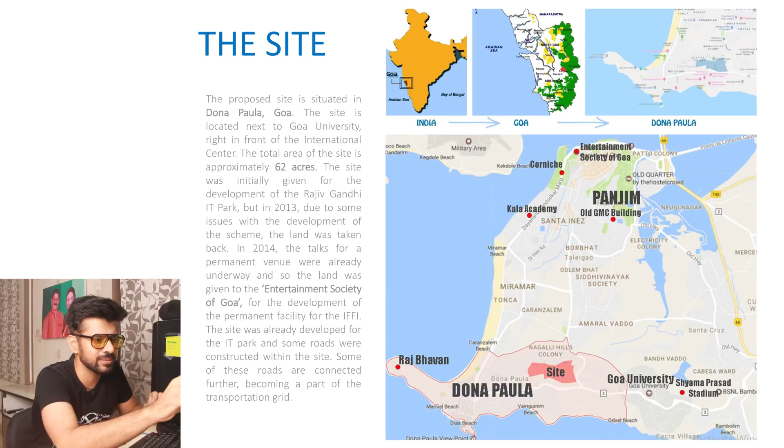Some stats I'll give you about the site. The site is approximately 62 acres. It was initially given for the Rajiv Gandhi IT Park, but there were some corruption issues. Something happened in 2013. The site was taken back from the Rajiv Gandhi IT scheme and it was given to the Entertainment Society of Goa, which was specially formed to look after the International Film Festival of India. So those guys were given this site and they were told, you know what, do whatever you want to. And they were like, yeah, tab se ab tak kuch hua nahi hai. But so this is where the site was and this is where the complex was to be made.

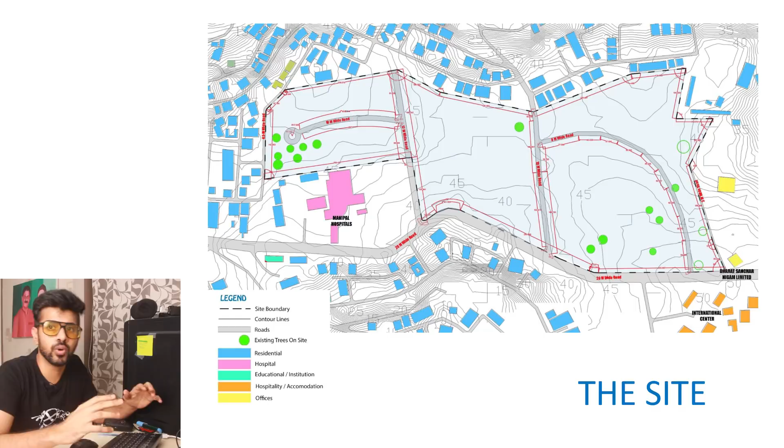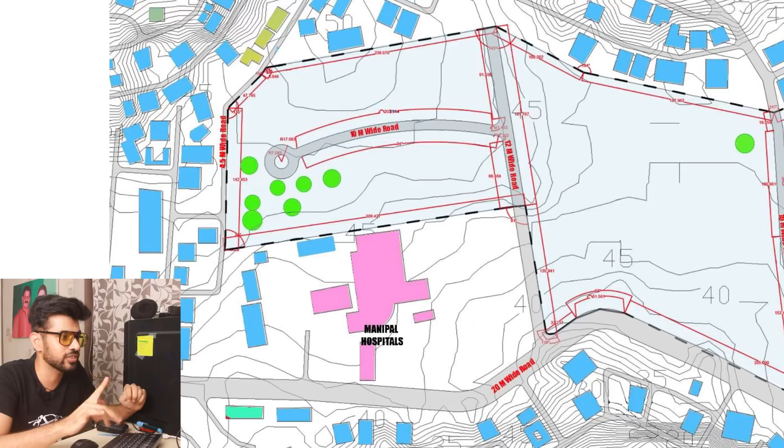Okay, so the blue are the residential areas. There are some hospitalities, some government offices here and there. Now one major thing that I do want to tell you is there is Manipal Hospital right next to the site. This thing that you can see in pink, that is Manipal Hospital and it is right next to the site. So this was one thing that I had to take into consideration.

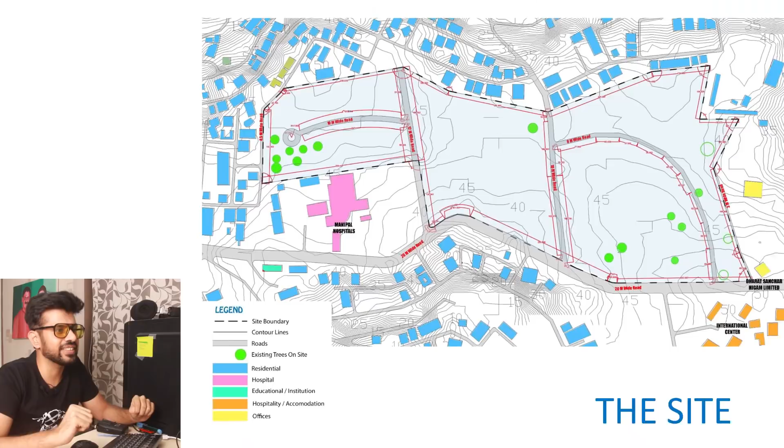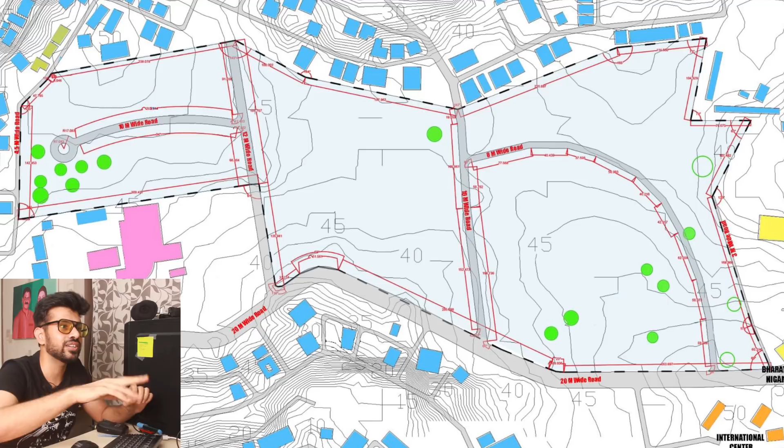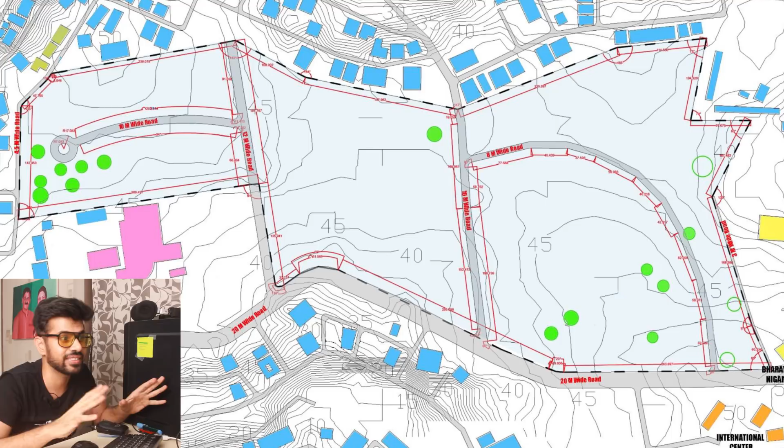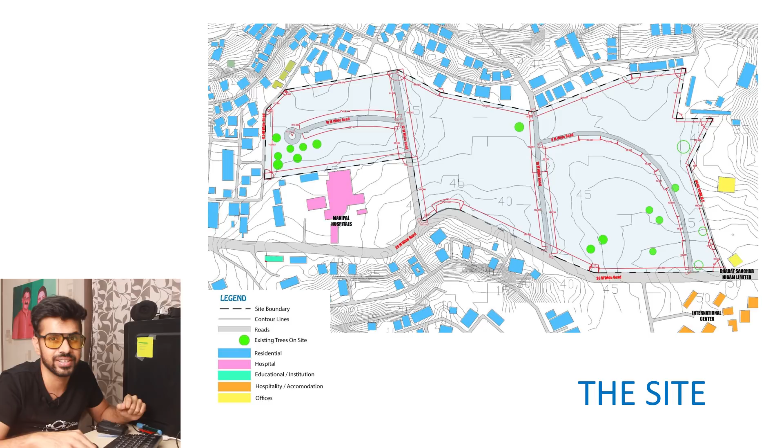Now one thing also I will tell you about this site is that obviously this huge parcel of land is the site, but do you see the roads inside the site? So the Rajiv Gandhi IT people had already started some constructions, divided this site, and then made roads which further connected to the localities at the far end. According to the government, these roads had to stay there and I had to just make things around these roads. So even though I had a 62-acre site, the site was basically divided into 3 parts. So this was the one main challenge that I had on the site. But let's go on to tell you what all functions were needed on the site. What was the program?

And as if these were not enough, I added 3 more programs of my own: a 3D simulation and a virtual reality building, a motel which finally turned out to be guest houses, and third, a drive-in theater. So these were 3 additions that I gave to the site.

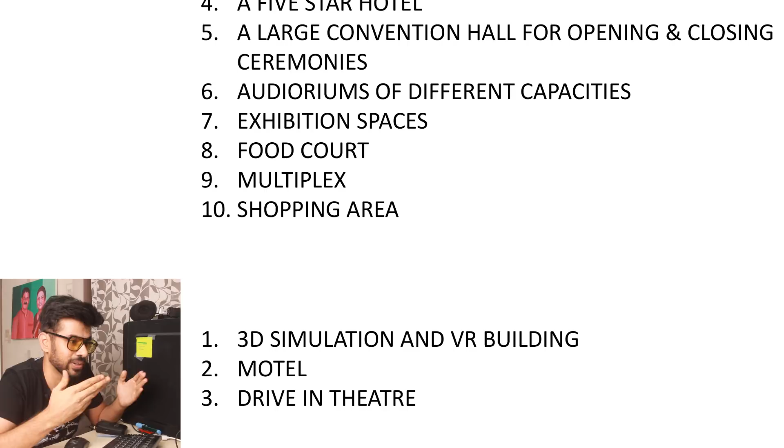So because of these huge functions, there could be limitless possibilities. I could just do anything anywhere. I could place this here, this here, this here. But to be honest, that did not make sense to me. I needed it all to make sense. I needed there to be a reason that this thing is placed here, and that reason had to be strong. I needed the placements to make sense as a whole.

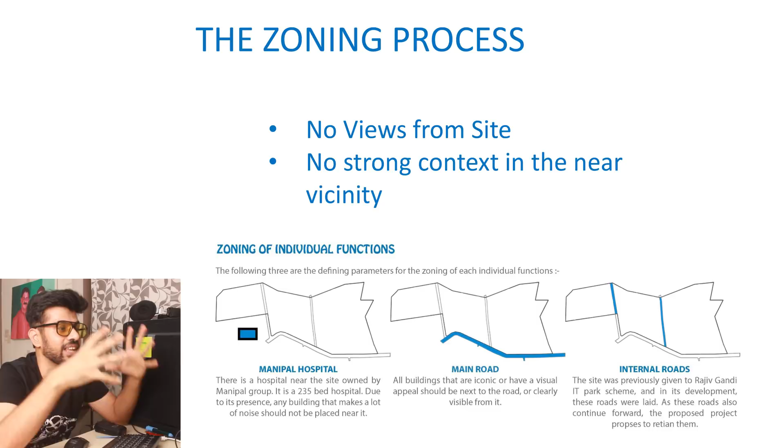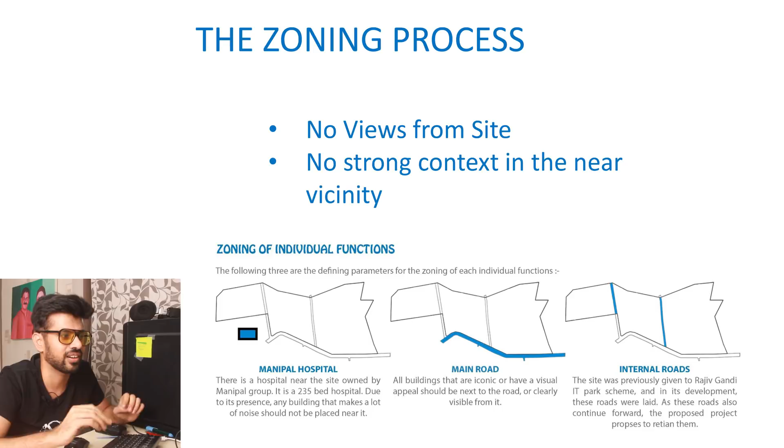So, this is something that is important and one of the genius things that I did on the site. There are three main factors that I had taken from the site. Obviously, we know there are no views from the site. There's literally nothing visible from the site except some buildings and dead trees everywhere, and no strong context in the near vicinity. So even though Goa and Panjim as a whole have a strong context, there was no strong context on the site, and even the beach was very, very far. You can't walk and reach the beach. Obviously, there are these constraints, but there were also three more constraints.

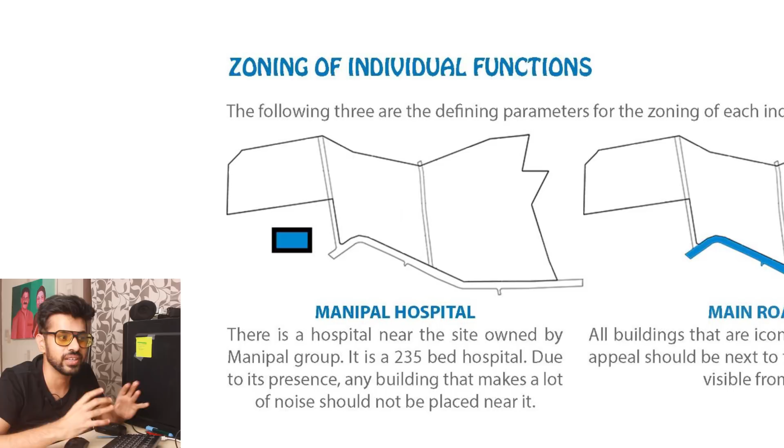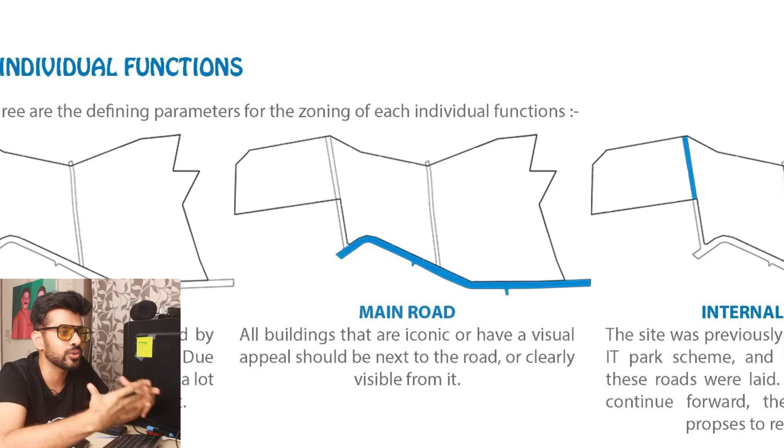One was the hospital. The hospital was right next to the site, so I had to make sure things that make a lot of noise should not be near the hospital. Second was the main road. This main road is where people will approach the whole thing from, so a lot of buildings that have to catch attention need to be near the main road. The third was the internal roads. Other things could be reached through these internal roads, but these internal roads also divided the site into three halves.

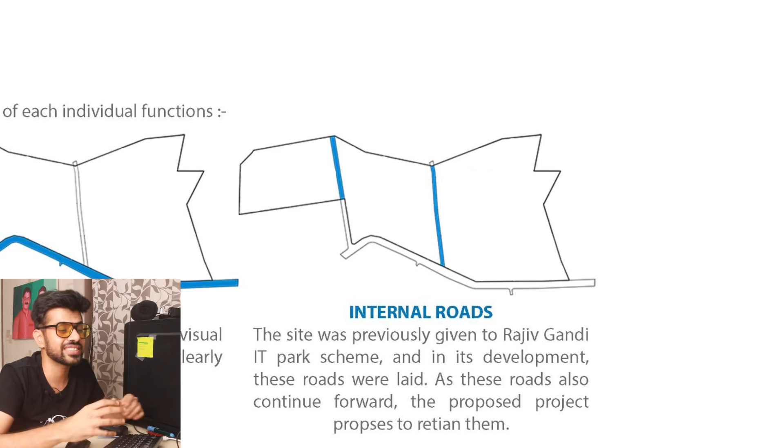So taking these three constraints, to be honest, I had just done random things, and I had made like 15 different site plans randomly. And my thesis guide was like, yeah, why don't you just take one of them? All of them look nice. Just take one of them. I was like, no, sir, this still does not make sense to me.

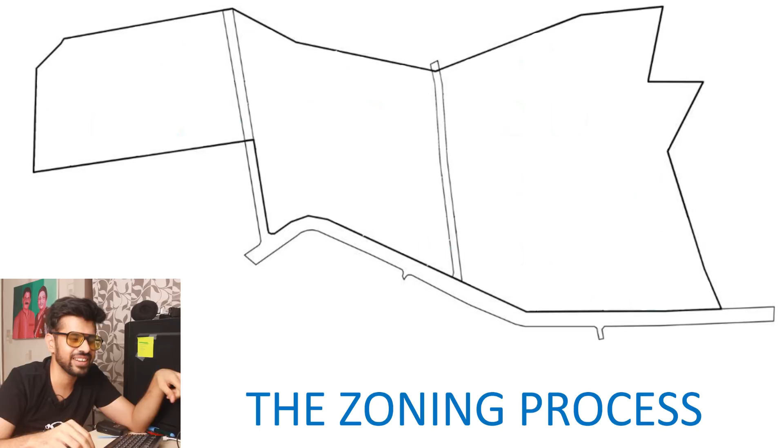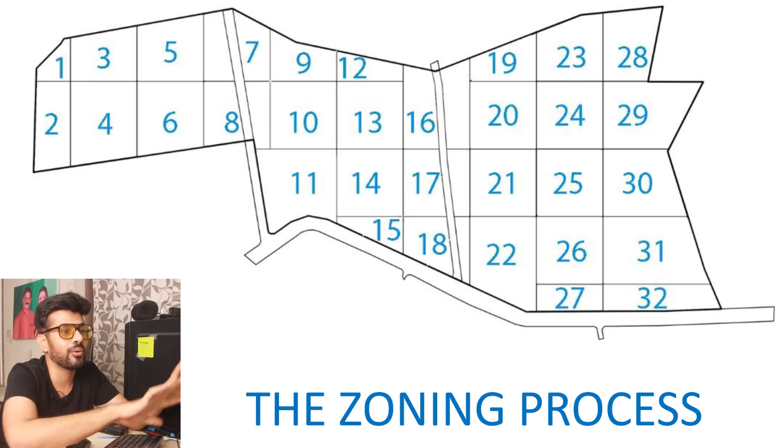And I was frustrated, and randomly one day I took this site plan and an A4 sheet, and on that A4 sheet made a grid. So this grid that you see, I did not divide the site evenly or properly within areas. Maybe I should have done that, but using that grid on the A4 sheet, I just divided the whole site. And now I had all these 32 different zones on the site. Now comes the genius part.

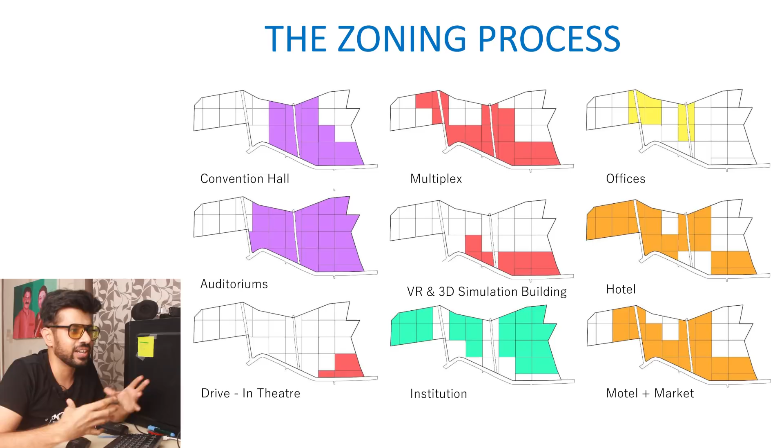I took each of the functions individually and zoned them. So convention hall, where all it can be, multiplexes, where all it can be. And all of these had parameters. Convention halls needed to have easy access, but could not be near the hospital because it would make noise. As much as it is insulated, it would make some noise, and it'd be huge because these are opening and closing ceremonies. So obviously it can't be near the hospital.

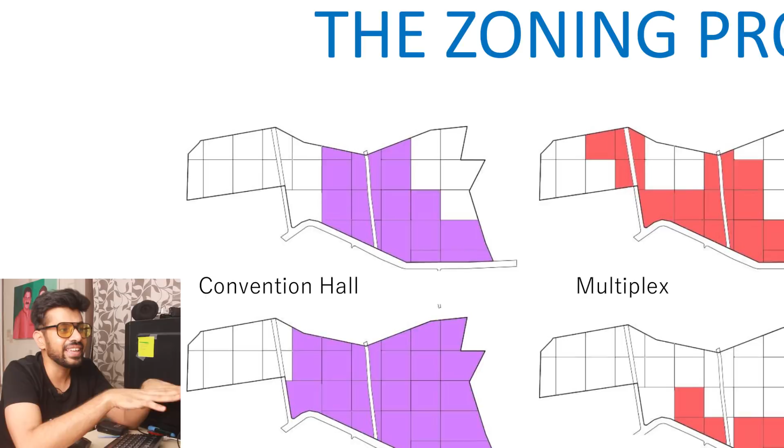So like this, I had parameters for all of them: offices, auditoriums, VR and 3D simulation buildings. For some of them, the main concern was they need to be near roads and visible. For some of them, it was to stay away from the hospital. So I zoned each of these functions individually.

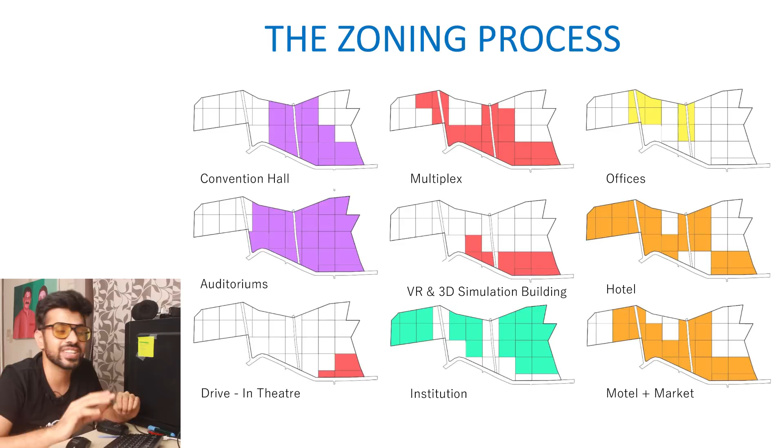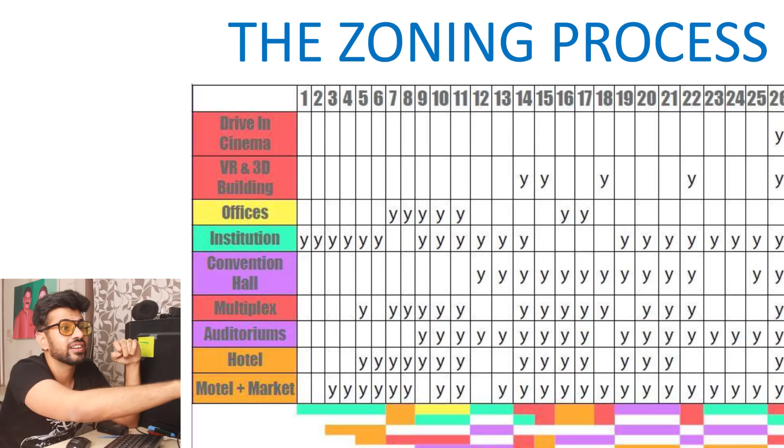And then I took them all to Excel. Remember, I had given numbers to all of these zones. So I had made this Excel, I had written the functions, the zones, and what thing can go where. And below this, I had sort of tried to see what functions I can club together.

So if there are functions that I can bring together, like on the ground floor, this can happen, on the first floor, this can happen. Somehow if those functions can be clubbed together.

So let me just share with you something that happened during this time. So I had reached this stage and just made this Excel sheet, and we had a sort of discussion at that time. So we had intervals of discussion. My external guide was there, my thesis coordinator, the person handling all of thesis was there. There was my thesis guide, and there was another random teacher. And I had told them what I was doing, and I had showed them this Excel sheet.

Now I had not made anything beyond this. This is the point till then that I've reached. And obviously it was a little later into the semester, but also getting that idea of this is what I could do took a little while. It was not that instant. And I remember the reactions. So these were the reactions.

My thesis coordinator was sitting there like this. My external guide, who's the person that comes from outside, who's a practicing architect who helps us out, was looking at my whole thing like this. My thesis guide was obviously horrified. And finally, that fourth teacher, I still remember, she denies she even did that, but I still remember what she did, and she looked at my whole sheet and she was like,

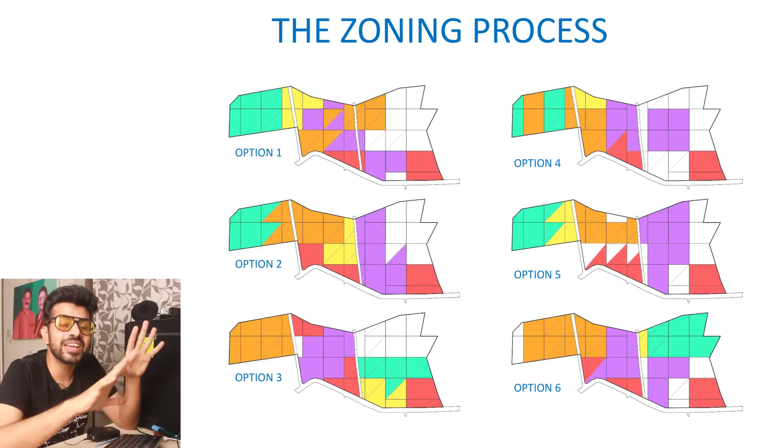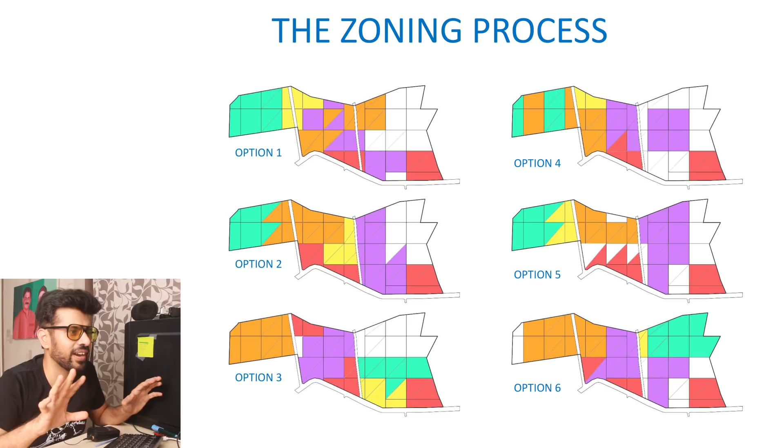Alright, so after I made the Excel sheet, here is what I did. So then, clubbing the things together and seeing what I could place there, I made 6 different options. So these 6 different options of where everything could go. Now, obviously, you might say, so yeah, just pick one of them and be done with it. I was like, no, no, no. We need to go further.

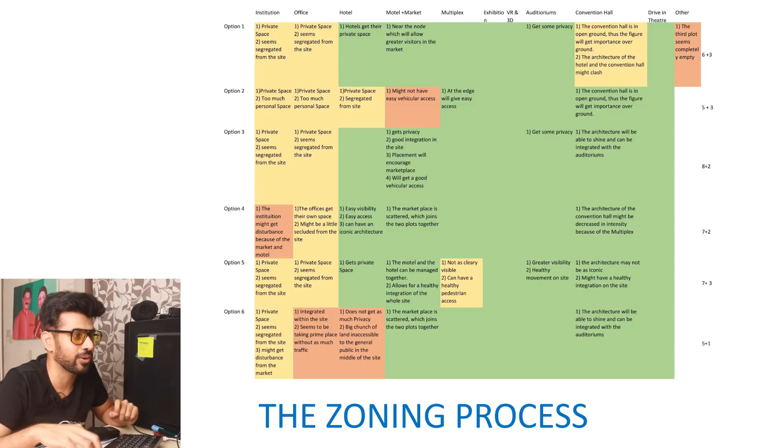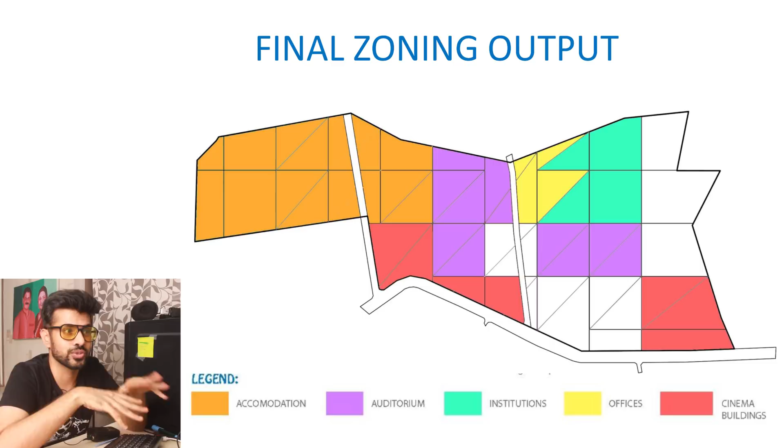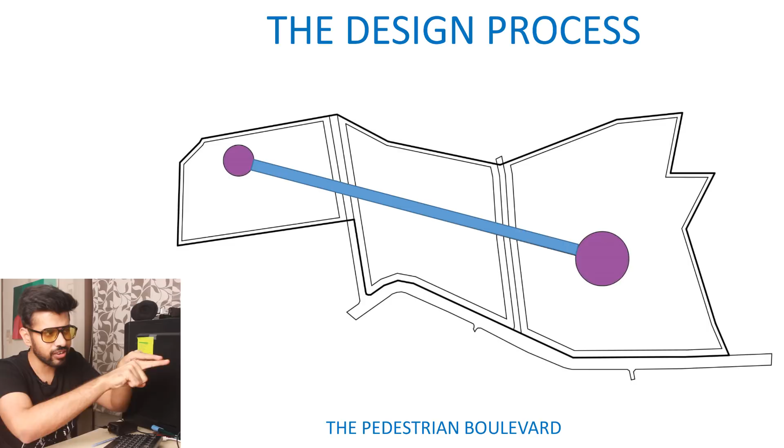Now let's come to my concept. So up till now, till my 5th year, I always took concepts that were complicated or that had a lot of thought and a lot of this and that into it. For my thesis, I was like, you know what? It needs to be simple. I made an axis, one straight pathway through all 3 parts of the site, and I said, I want this to be a pedestrian boulevard.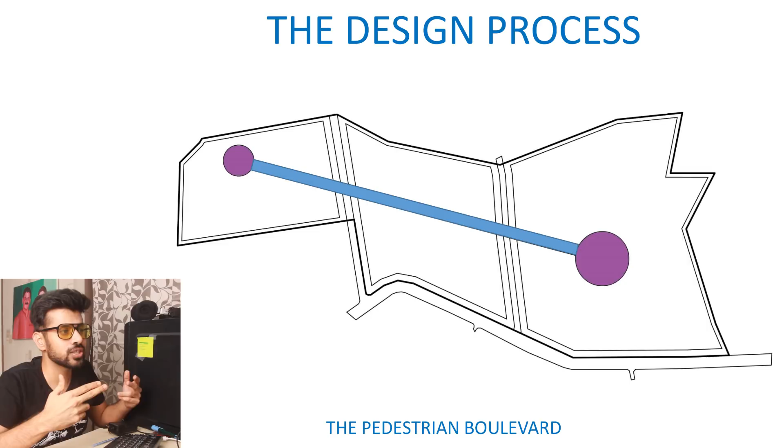I want a simple straight walkway that crosses all of these 3 and combines the whole thing together. I wanted something that could join the whole thing together. And this would be an axis. You would be able to see through the site with this axis. And obviously, wherever there are axes, you need endpoints, you need focal points. So there needed to be 2 focal points right at the end of each side of the axis.

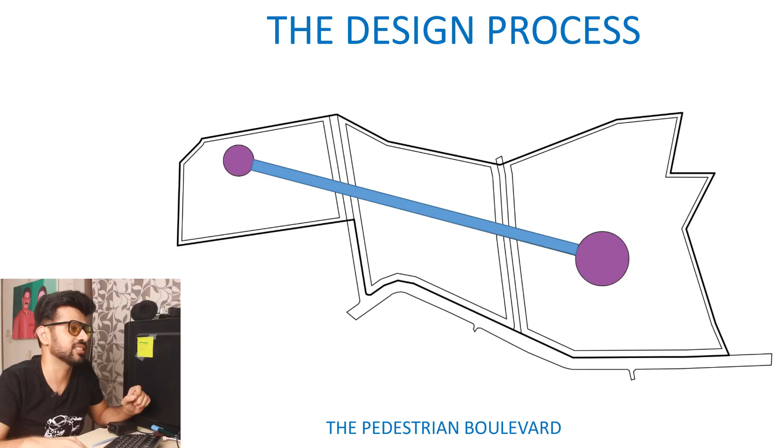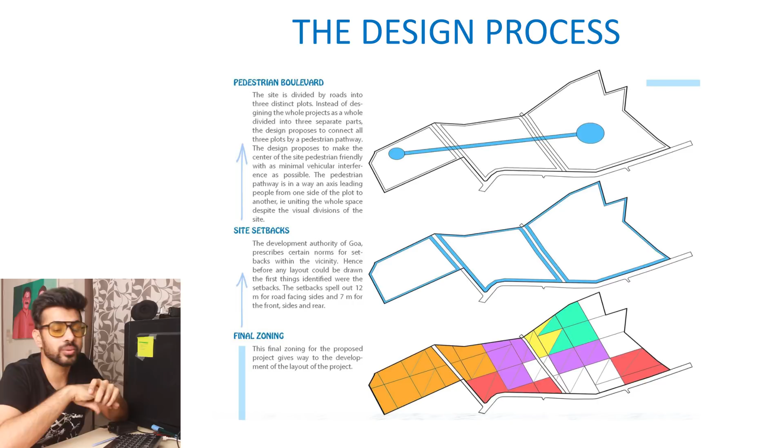Okay, so my design process. So obviously, there's the pedestrian boulevard, that is the concept. There are site setbacks that I have to take into consideration, and there was the final zoning that I had done. Now, using all of these 3 things together, I merged all of them and finally came up with my very first site plan. My thesis guide was finally relieved that I was doing something.

And to be honest, by the end of it, he trusted that I would take care of the design part till the end of my thesis. And he used to discuss practicality in a lot of things with me, because I used to sometimes go a little big with my ideas.

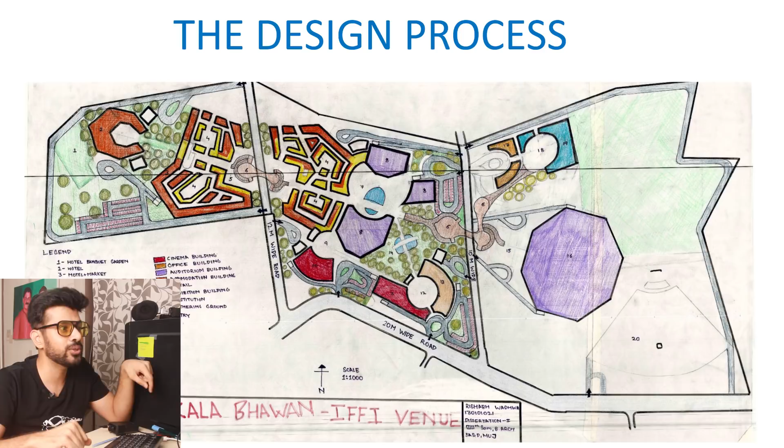And he was like, Rishabh, designing you can do, let's talk practicality, let's talk construction methods, let's talk these things, because that is somewhere you're lacking. Design you can do. So this was the first plan that I made. I will not go into this because I evolved this first plan into my second plan. I will not go into this as well. I will go into my final site plan.

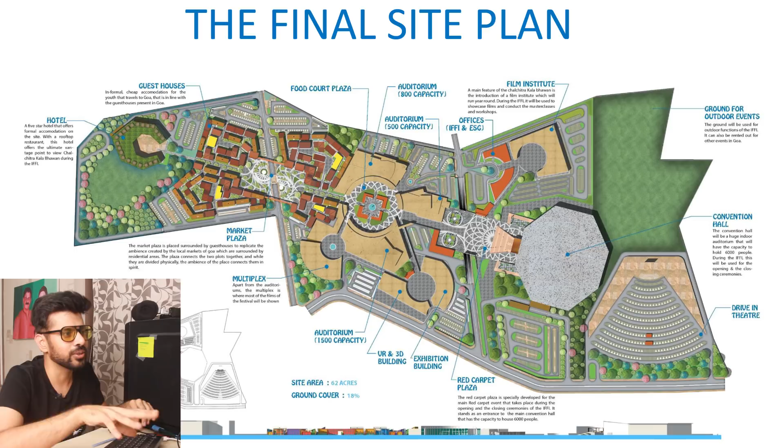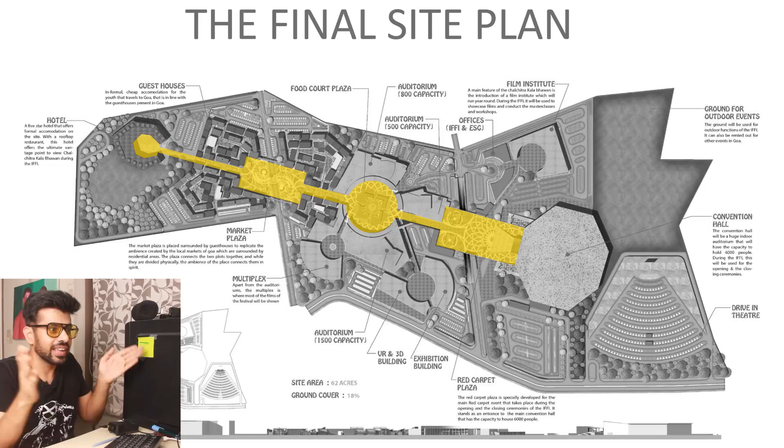So this is the final site plan that I made. If you can see, there is this whole pedestrian boulevard that goes through. And obviously, it could not be just a same-width straight pathway. It needed to get narrow, then bigger, then narrow again, and then bigger, and then narrow again, and then bigger. So there's that drama that keeps happening while you walk through. The focal points that I talked about.

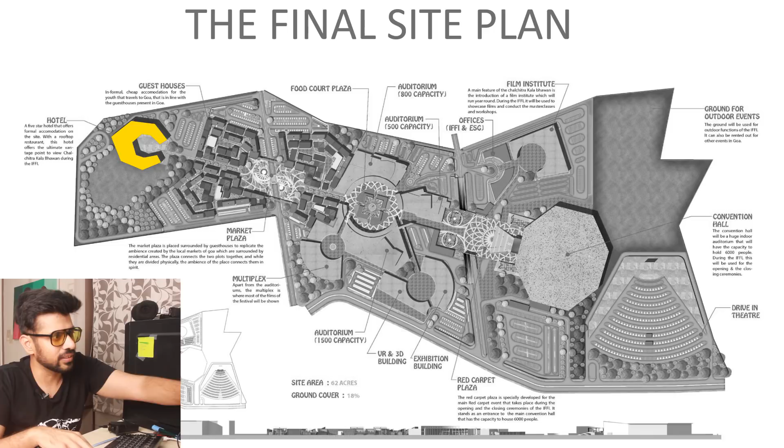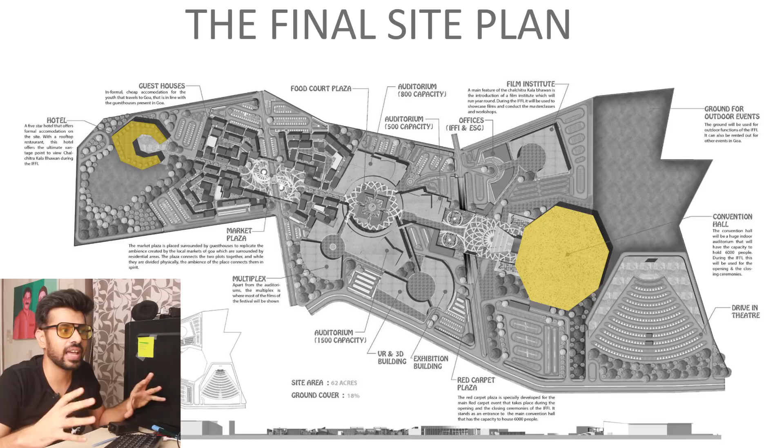So you see this, that is the hotel at one point, and you see this, that is the convention hall at one point. So these 2 are the focal points, and these 2 are the biggest and the tallest structures on my whole site. These are both 6 stories tall. Keeping with the context of Goa, nothing is high rise. Everything is like 2 story, 3 story at max. These 2 are the only things that go up till 6 stories.

So when you're on this central axis, you can see on both sides. On one end, you can see the convention hall 6 stories high. On the other hand, you could see the hotel 6 stories high. So these were the 2 main focal points. So let me tell you all of the functions that I made. Obviously, I've told you about the hotel. Then there were the guest houses. So these were the guest houses that I made.

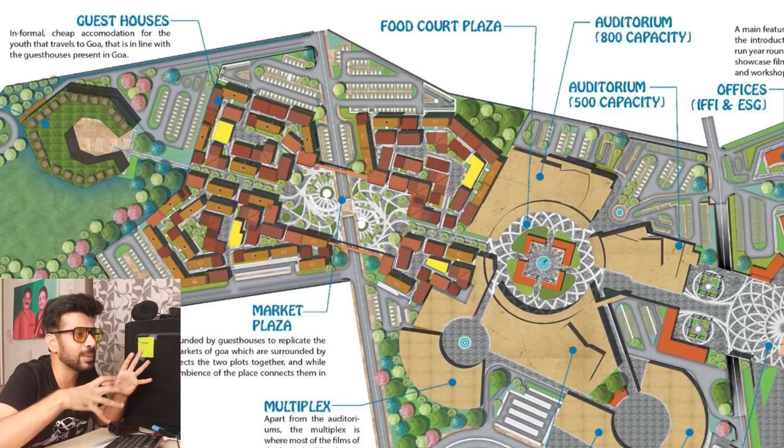Now the planning, I wanted a planning similar to what I saw in Panjim. When I went to Panjim, the old neighborhood, I had actually stayed inside it while I was doing the site study as well. And the roads there were not straight, were not on a grid, were not something that you could easily grasp. It took a few times to go through, and then you would understand, oh, this meets this here, this meets this here. So I wanted that feeling.

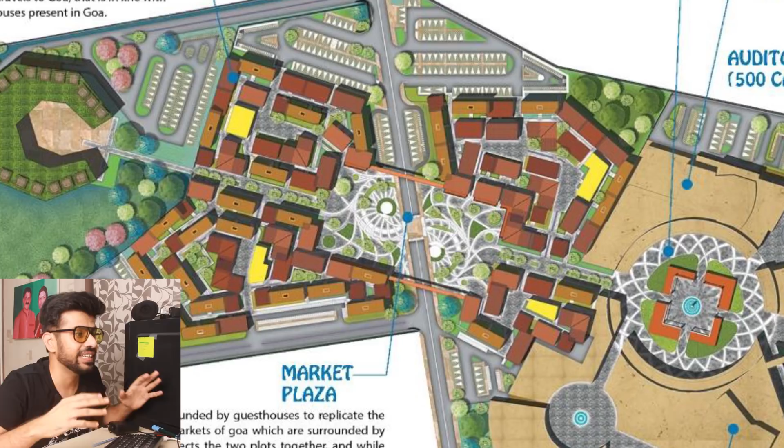So these were some of the visuals of the whole area, and I wanted these visuals in my site. I wanted people to have an area to get lost and then discover new things and then get lost again, and maybe take half a day to understand the area around. And that is why I made these the way that I've made them. I'll get into them in detail as we go forward, but let's move on.

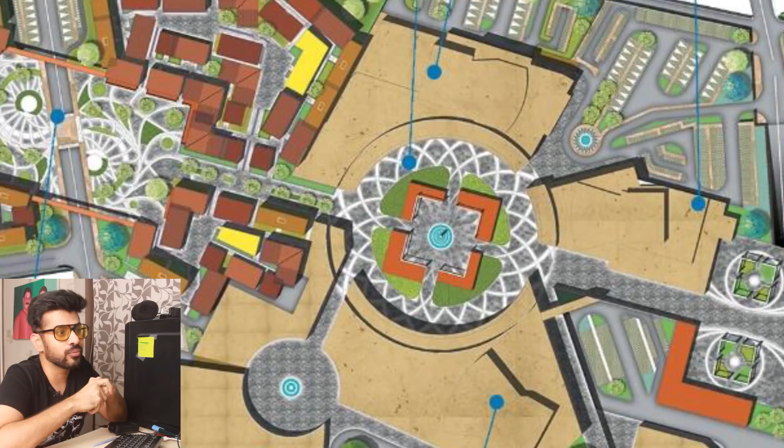There's the market plaza. On this axis, there are 3 different plazas. There is the market plaza, right at the center is the food court plaza, and right in front of the convention hall is the red carpet plaza. The market plaza is actually integrated with the guest houses. The whole feeling is similar to being in a neighborhood where there are guest houses all around, and then there's a central marketplace. Just like you see everywhere in India, there are central marketplaces and residential areas around them. So I just wanted that feel.

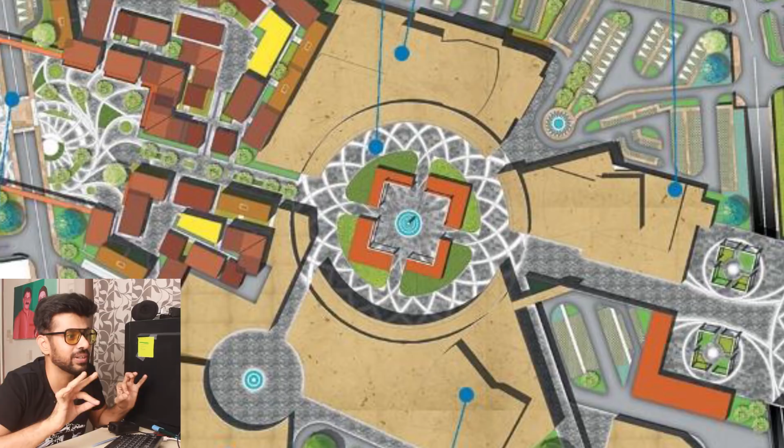Moving on, we come to the food court plaza. Other than just food available here, there are auditoriums surrounding it. So this is the main plaza. This is where everybody would be because all three auditoriums are here. The multiplex is nearby, the exhibition, the VR 3D simulation buildings, everything is nearby. So this is the main area where everybody would be.

Moving on, we come to the convention hall, and obviously the red carpet plaza right in front of it. This is where the red carpet events would take place. If you've seen Cannes Film Festival events where everybody wears random things and walks the red carpet, this is the area where that would happen. Again, all of these three plazas I will discuss in detail. I'm quickly going over the site plan.

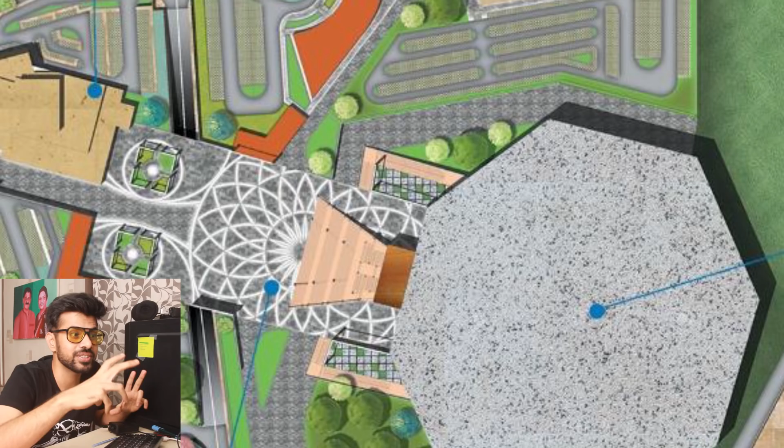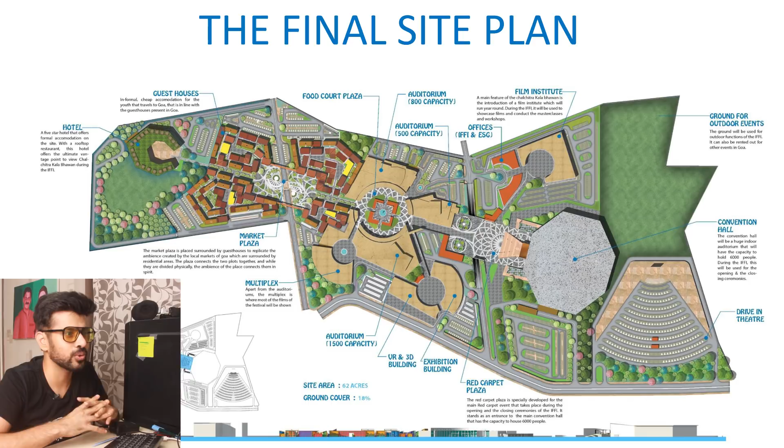Then there are the offices for IFFI and the Entertainment Society of Goa. There's the Film Institute, and finally there is the drive-in theatre. This is the whole site plan. In this sheet, what I want to show you is how the pedestrian boulevard, the thing I was talking about, goes back, becomes narrow, opens up, becomes narrow. So this is what is happening.

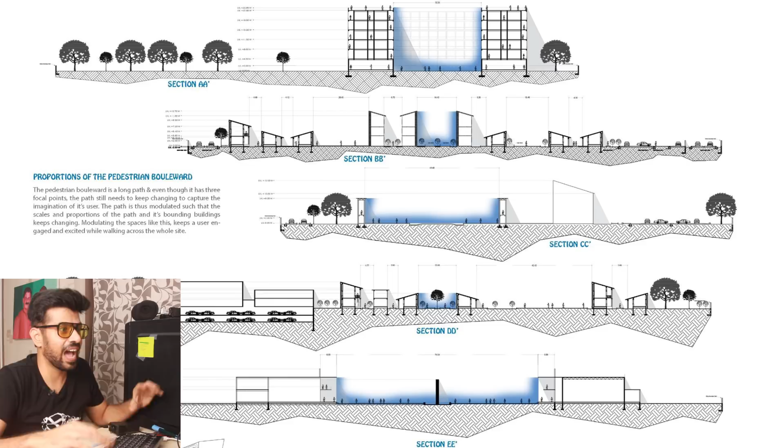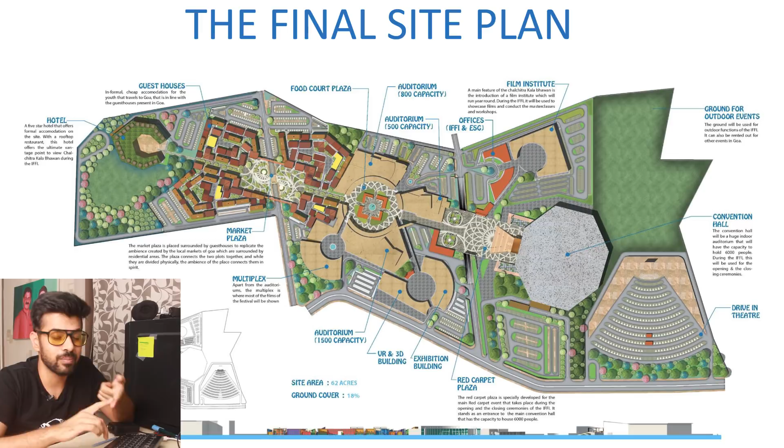I was really, really happy with how this came along. The whole sections together, they looked very, very good. All right. So obviously in my whole plan, because it was so huge, I was not gonna detail out each and every function. I have a limited time for thesis. So obviously I was detailing out the three plazas, which was the market plaza, the food court plaza, and the red carpet plaza. And I detailed out everything that was around it. So basically in this whole plan, I detailed around all of these areas.

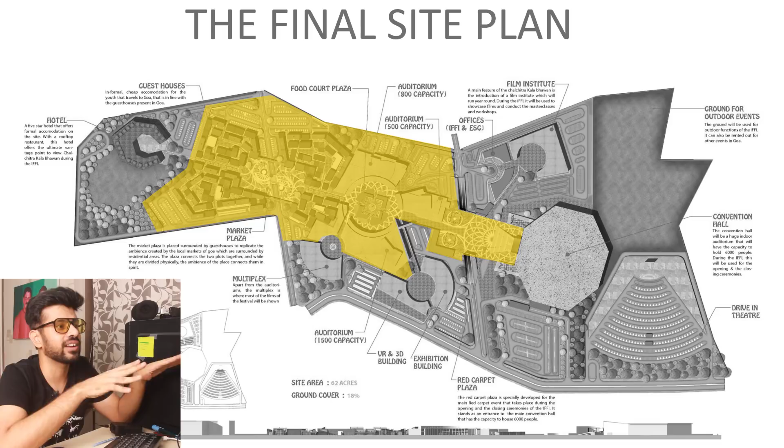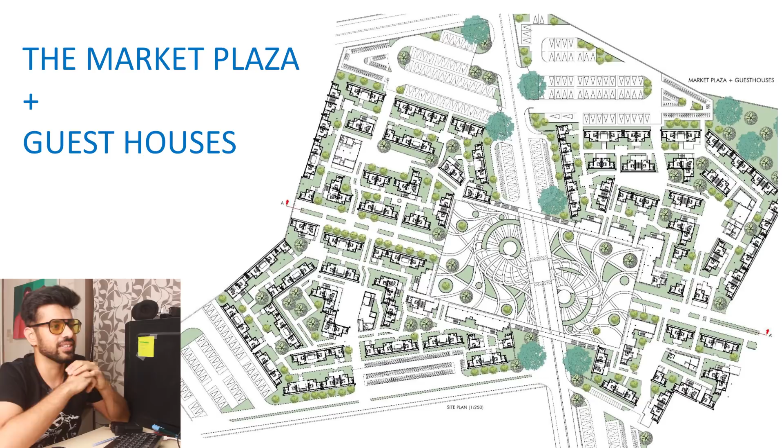Let's move on to my very first area, which is the market plaza. So this is the plan for the market plaza plus guest houses. I wanted to give a community feel, like have a central space and then get into your own personal areas. But then all of these central spaces also open up into the big area, the marketplace. So I had actually imagined it so that the thelawalas and everybody would come together and make a whole summer winter market here.

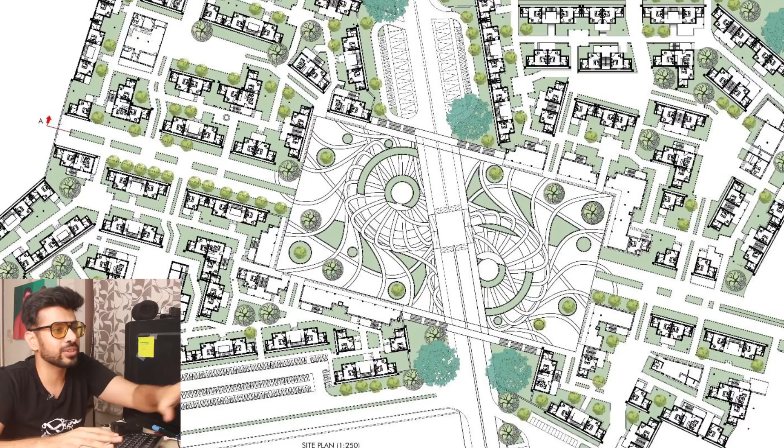And people can just go through the shops and just look at everything. On the periphery, there are shops that are permanent shops, but other than that, all of the shops that I wanted here were temporary. I wanted a proper Indian market at this place.

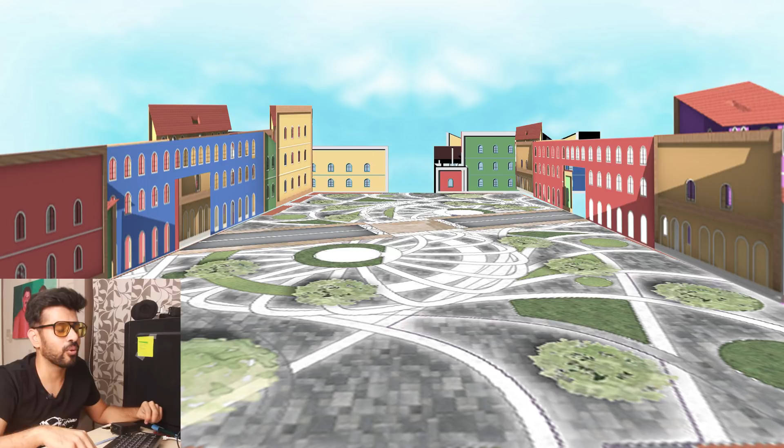Obviously they are cut out from between so that cars can go through them. But overall, when you're standing there, visually the whole area would look one. The whole area would look like a pedestrian plaza, although there is a road crossing through here. So that is what I wanted, this plaza to bridge the two things together so that the whole area feels one, does not feel divided into two halves by roads. And I think I was pretty successful in doing that.

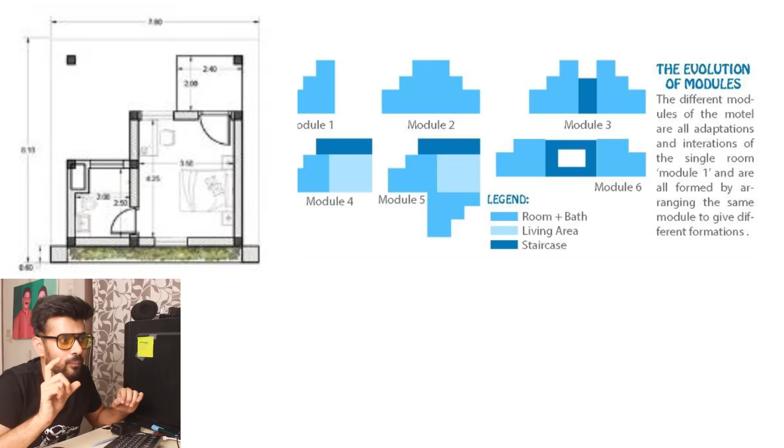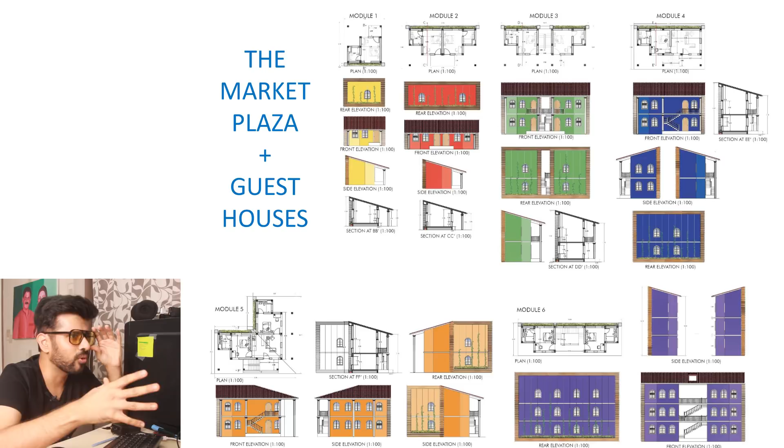So this was something very easy and very quick. I'll just go through this. So this, as you can see, is one bedroom, a porch and a bathroom. This was the guest house that I had created. I had just mirrored it and this became module 2. So basically all of these guest house plans that you see here are just an interplay of these 6 modules placed in different random places. So this is what these modules look like: module 1, module 2, module 3 becomes 2 stories, module 4, 5, 6.

Now all of these colors here that you see are also inspired from the old Portuguese neighborhood because I loved the colors there. I just completely loved them. So these were the elevations, these were the sections of the whole place. Yeah, so this was my market plaza plus guest houses. Now let's move on to section 2, the food court plaza.

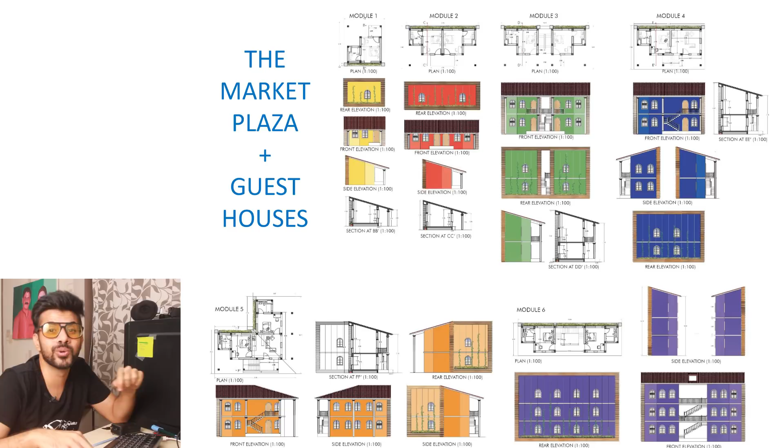I hope I'm editing this video so that this doesn't become too long because it's been an hour and I've been speaking about my thesis. So let's just see. All right, it's gonna end soon.

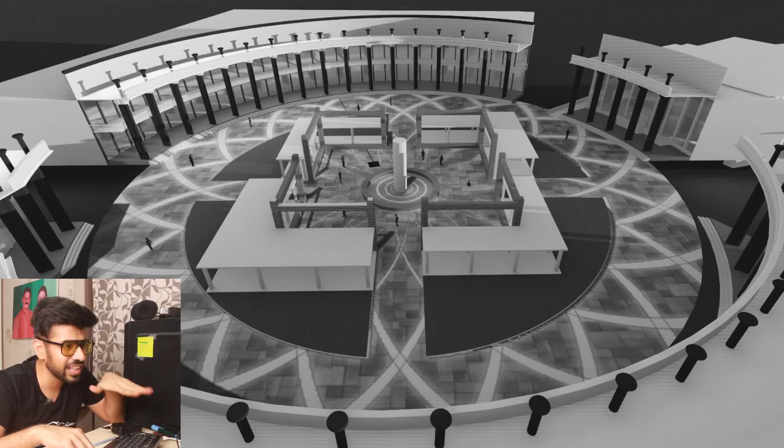There's this food court plaza and red carpet plaza. Just two more left. So the food court plaza would be the central place. The visual is not that great, but it gives you a glimpse of what I was trying to create in the whole area. Let's come to the plan. The food court plaza is the central space in the whole site. It has three auditoriums surrounding it, of three different capacities. It also has restaurants, fast food joints.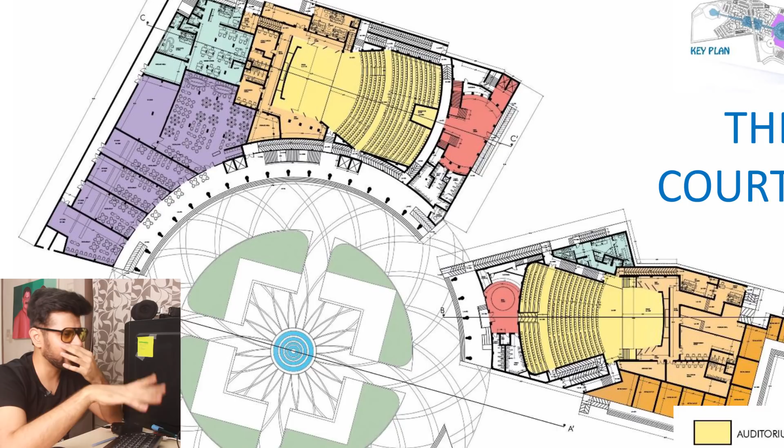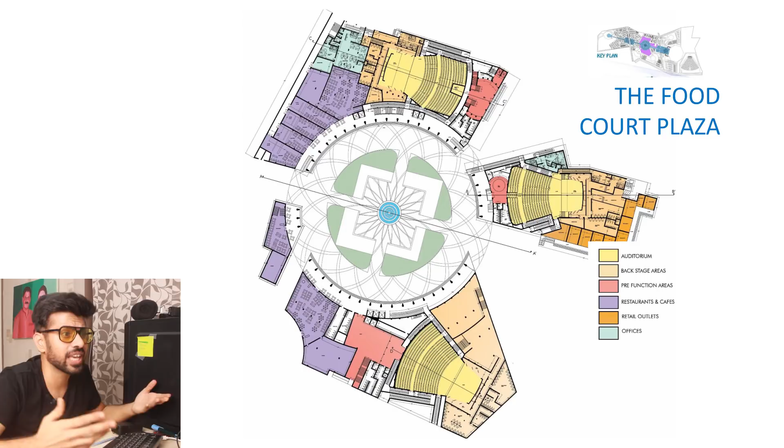The central landscaping was something that I played with at that time. To be honest, today if I see, I would just keep the place empty because I think what I did there was not as great. Maybe I'll revisit this whole section. But other than that, the auditorium plans and everything I worked on came out pretty decently. It came out pretty well. Yeah, that was it. I don't think there's much conceptually to tell you about it.

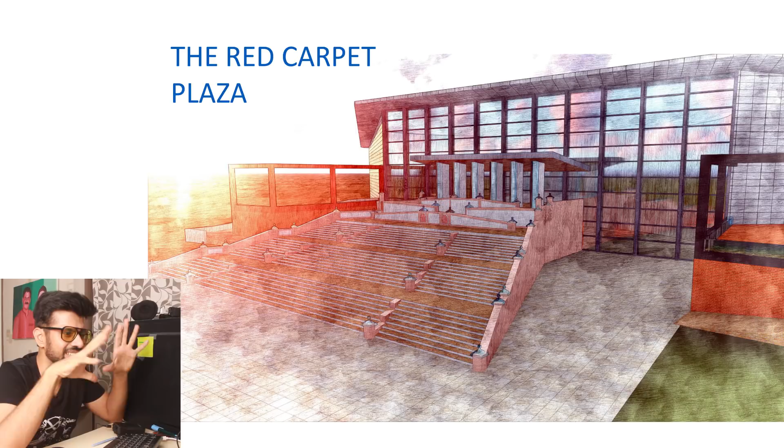And then finally we come to the red carpet plaza. The red carpet plaza is the place where, you know, the whole red carpet thing would happen. So I wanted it to be grand, to be big, and that is why, even though this visual is a little sketchish and kiddish, this is what I wanted: stairs that lead up to the central area lined with red carpet so that people can walk up and down and they can have nice shots taken of themselves.

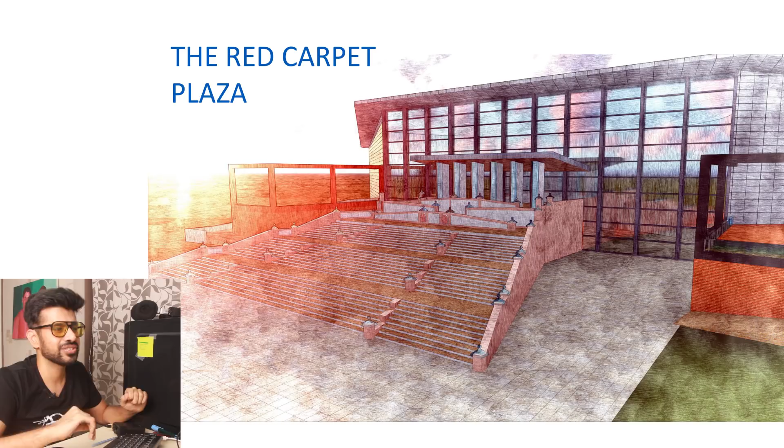And the whole building, I wanted it to glow from behind, and that is why obviously right now it's reflecting the sky, but at night obviously this is glass, so there would be yellow ambient light coming from it, and there's wooden interiors inside, so it would look spectacular at night.

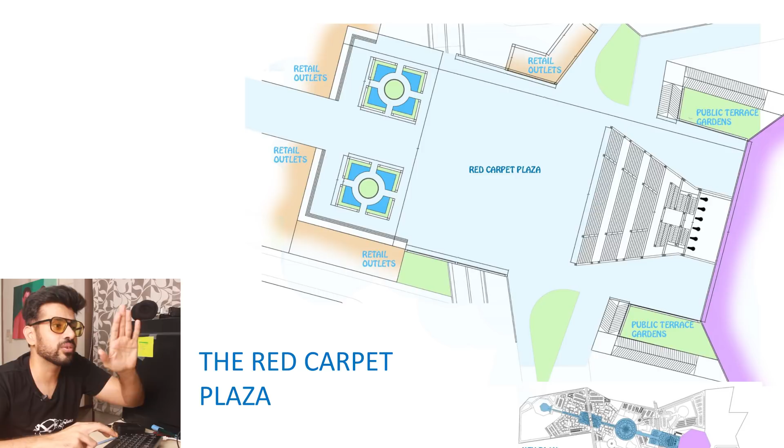The red carpet plaza in plan is pretty simple. Now here I could not let the road pass through the site because it would just disturb the plaza too much. So I decided that we would remake the road and it would go from below my plaza. I know it would cost a lot of money, but it made sense for the whole project because this area had to be one. So in the marketplace, we had let the road divide into two, but visually we had connected it to be one. Here, the whole place needed to be one straight surface.

Obviously, I did not detail out the convention hall because that would be another thesis in itself. So my thesis was mostly urban level because detailing these three plazas out is what I actually did. So this is where my presentation for NASA ended, but I would just like to take you back to the site plan and end it.

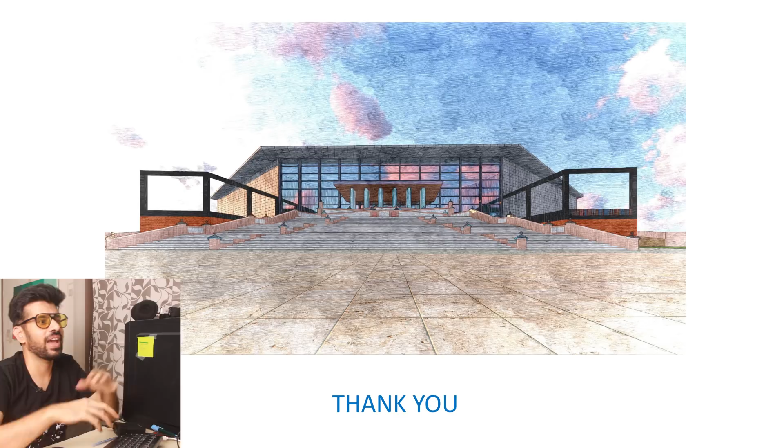This thesis, to be honest, was the most amazing project that I did, and the part that I loved the most was the zoning and then my concept. The zoning, I think, was a stroke of genius that somehow came into my mind, putting those things together. And the concept, what I loved, for the first time, it was so simple. Designing that simplicity was not as easy, but it was just a simple concept, and I loved doing this project. I love designing each and every aspect of this project.

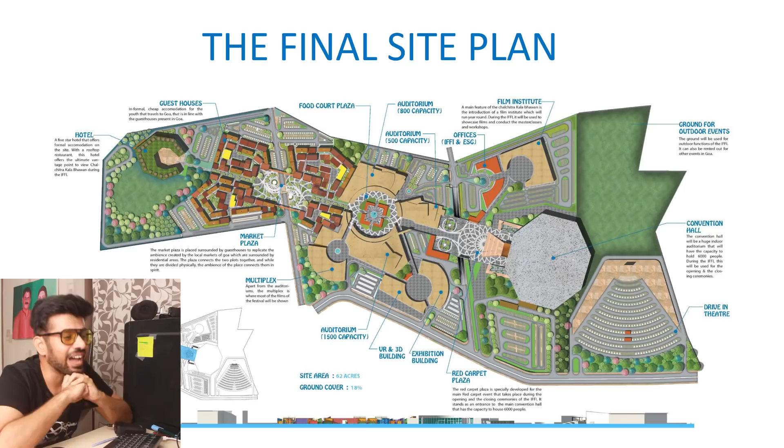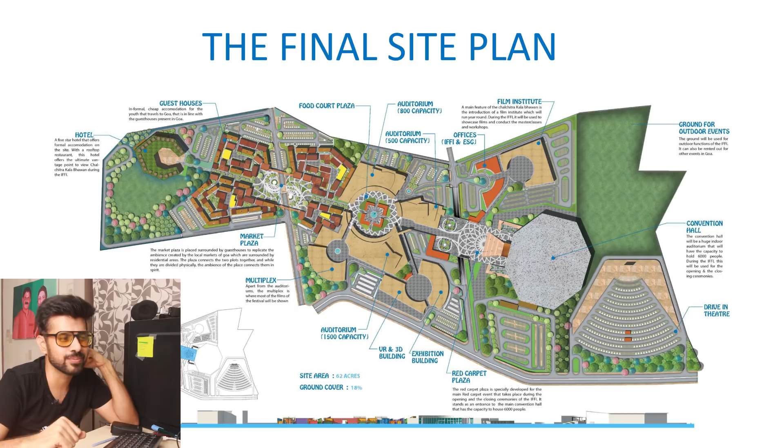And that is it. That was my thesis video. I loved this project right from the start. Right till the end, I loved it. Obviously, I told you it went for NASA as well, and came in the top 10. I was shocked when they called out my name.

And when I started speaking there, people recognized me. Obviously, I had my YouTube channel back then also when I went for the competition. So as I started speaking, some of the people actually recognized me because of my voice. They didn't look at me and instantly recognize. But once I start speaking, especially in a public place, I get into my zone. I don't usually talk like I'm talking on YouTube. I usually am pretty shy. I'm pretty mellow and would not talk as energetically. But once you put me on stage, in front of something that I love and explaining that, I will go on. So that is what happened once you put me on stage there. Some people recognized me. That was amazing.